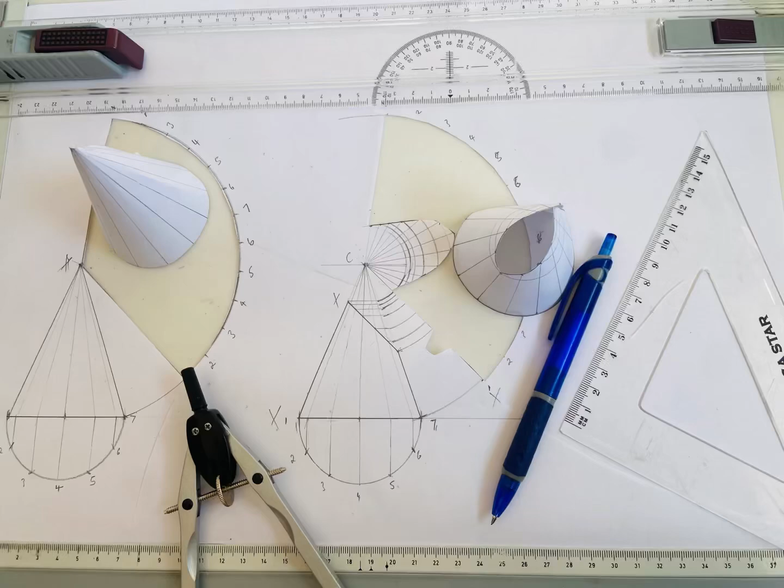Today I want us to deal with right angled cones. I want to deal with two types: the one that is a full cone and the one that is cut at the top. Now let me jump right into them.

So I'm going to make the base of my cone to be 60 millimeters. That will mean that when I want to measure it off my drawing board, I'm going to measure 6. Because why? The drawing board here, mine, has measurements in centimeters, and we know that in drawing our dimensions are going to be given to us in millimeters. So I needed to convert. So this is going to be a 60 millimeter long base of my cone. Now this is going to be the center.

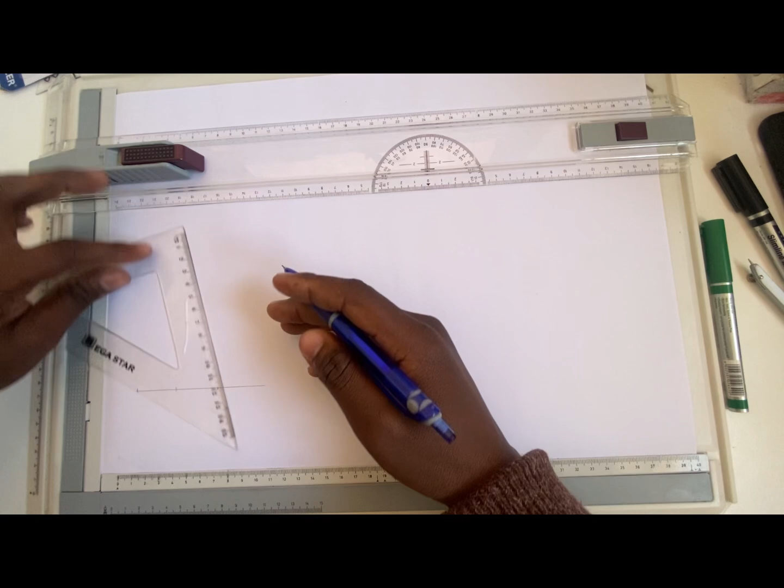Now the height, I'm going to raise it a fair height. Let me just make it maybe 8, which is 8 centimeters. That is equivalent to what? It is going to be equivalent to 80 millimeters.

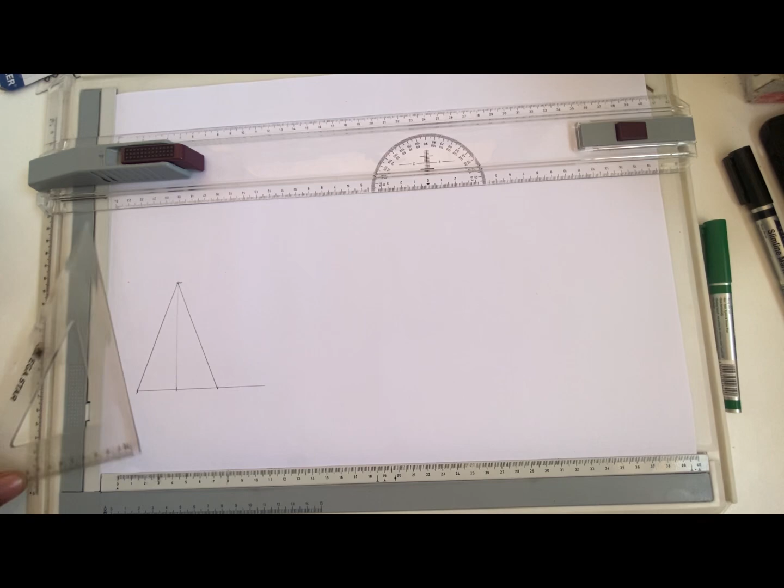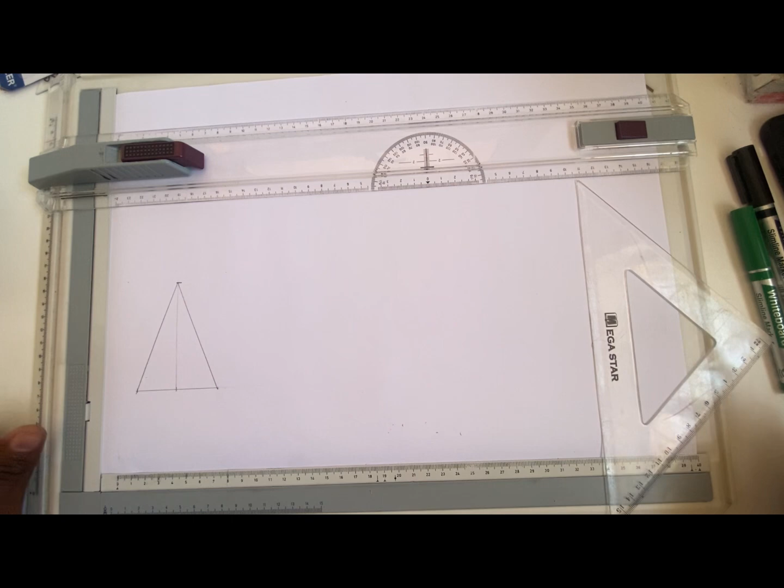That is how a cone would look. Now, given that these parts don't exist, just this one. So this is my cone. Now a cone would look something like that. Now, since this is my cone and I want to develop the pattern of the cone, first things first, you need to make sure that your given view is fairly visible. You're going to make it with your bold permanent lines.

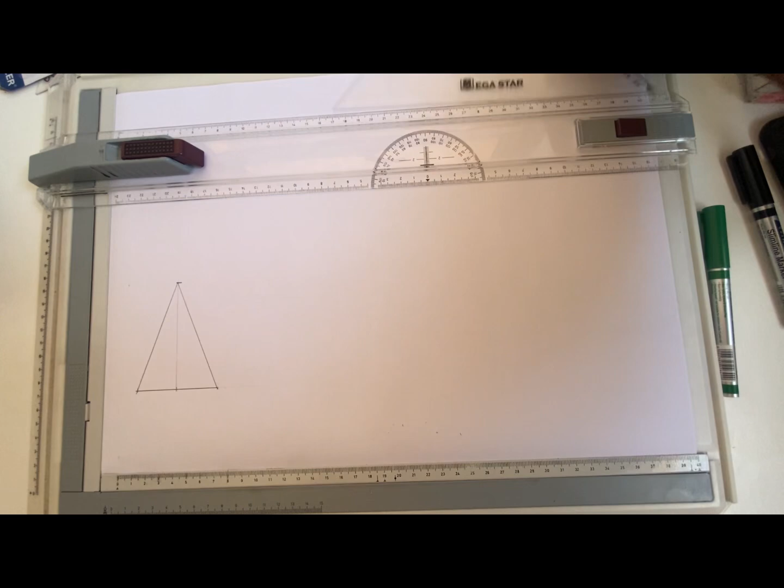Now that I'm done with mine, I'm going to go and find my bow compass. Now with your bow compass, you're going to come and make your semicircle at the base. Now it's going to be the base. Now that the base of ours is going to be from here, I'm going to make it like this. Now, once I'm done with that, I'm going to draw a line straight down.

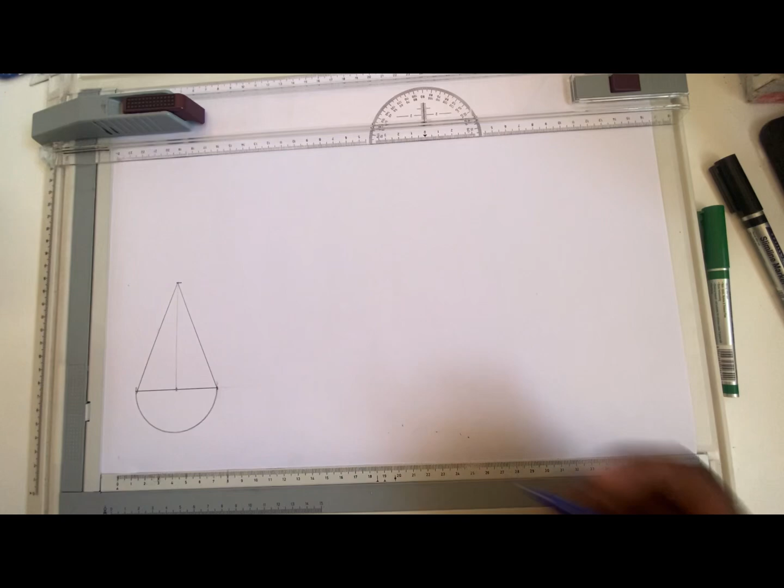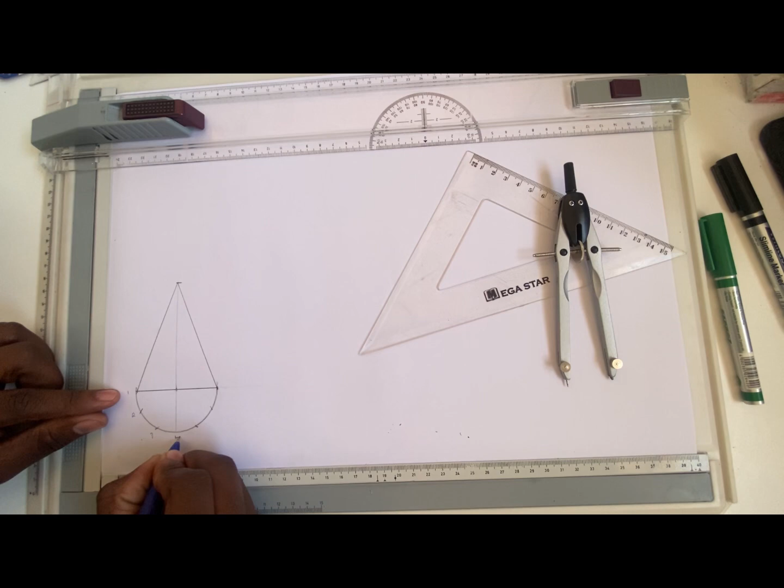Then again, I need to cut my semicircle. I put the needle part there, make an arc one side, make an arc there, and then again I come this side, I make an arc there, and then I come on this side again, I make an arc there. Now that I'm done with that one, I'm going to name it 1, 2, 3, 4, 5, 6, 7. Then I'm going to send them right to the base of my cone.

Now once you are done with it, you're going to send them from there to the tip of your cone. But for this cone, you're supposed to send them this way. But now for a complete cone like this one, it is not even necessary for me to be doing these things, but I'm going to do it. You will see these are going to help us when we have it cut at the top. But now this one is a full cone, so I'm just gonna do them for formalities.

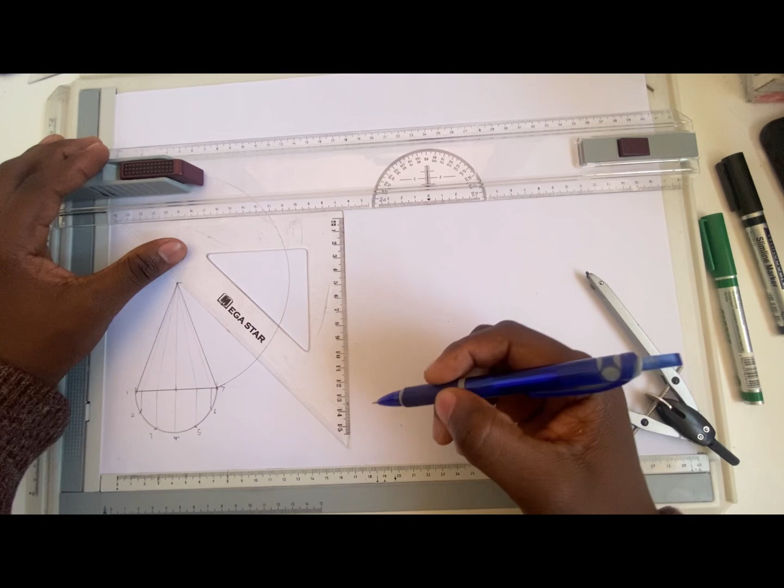And then you're gonna come with your bow compass again, position it like this, and take the longest side of your cone, which is going to be this one here. Then just like that, you send it out like that. Then you're going to pick where you want your development to start. You choose for yourself how you want it to start, from here, there, however you want, but you should link that line where you want your cone to start with the tip of your cone, and then from the tip to the arc which you just created.

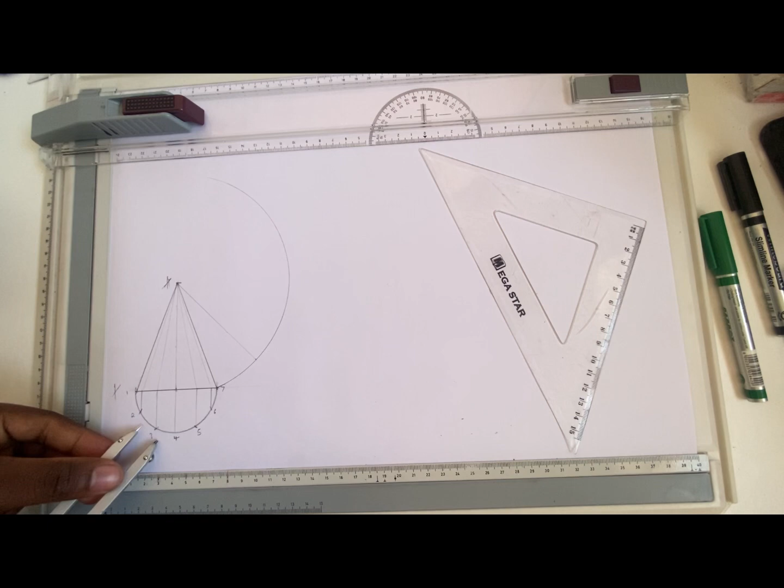That means I want mine to start from there, given that I'm opening from XX, I'm opening it from that side. So if I'm opening from 1, the first line will be my 1 line. Then you're gonna come with your bow compass again and position it at the point there. If you want you can also put it there. You're expected to measure all of them, but you've cut your semicircle into 6 equal pieces, so those pieces are equal. So therefore, if I have this one, I have all of them.

So then you're going to come here and make arcs. You're going to say 1, 2, 3, 4, 5, 6, 7, 8, 9, 10, 11, 12 will be somewhere there. I will just extend it just shortly.

Now you remember the numbers which I had here, you're gonna come and put them here. You remember that you said you are opening from XX, so the first point that comes is 1. So I'm going to be having 1 here, then a 2, then a 3, then a 4, then a 5, then a 6, then a 7. After that 7, because it's a circle, it's going to come 6, 5, 4, 3, 2, then again come back here to 1.

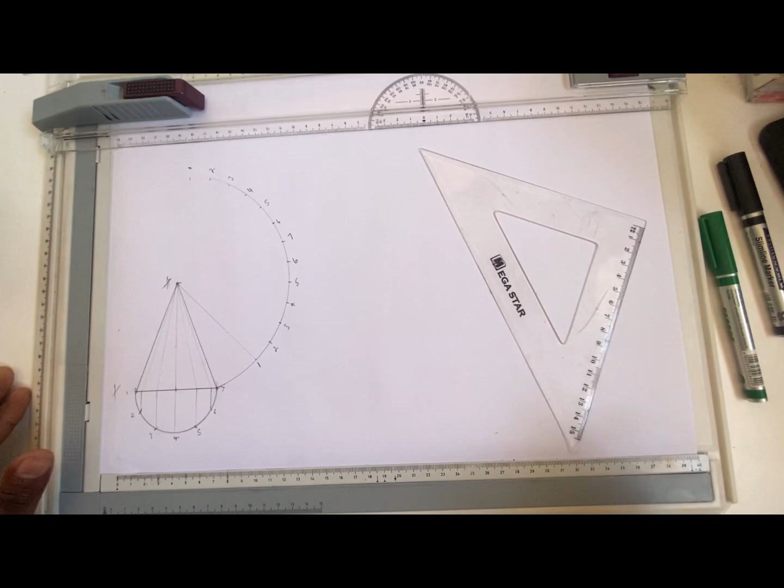So the same thing should happen. So I'm going to be having here 6, 5, 4, 3, 2, 1. Then you're going to take your lines and project them to the center, to your tip there, sorry.

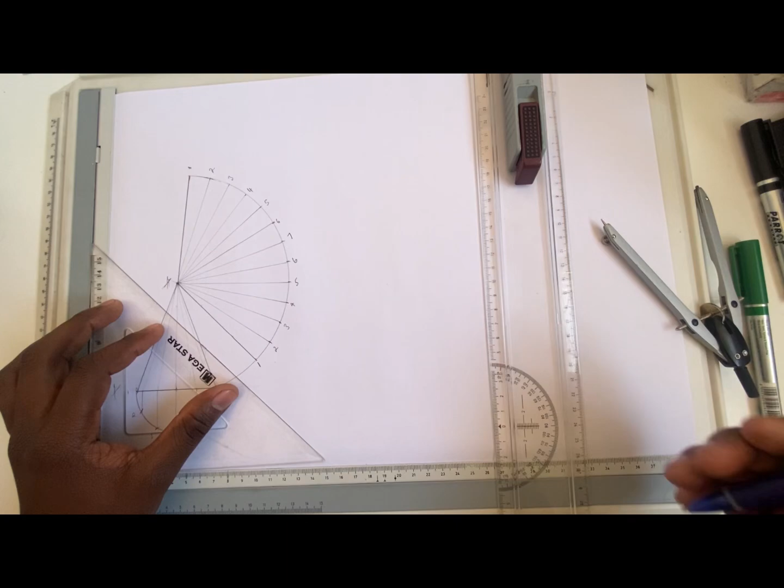Just an extending part, and then just like that I have my cone. You're going to come and highlight it out, make it bold. You take your clutch pencil, you go this side, from there you send it to there, supposed to be bold. Then also the edge again, this one supposed to be bold. Once they are bold like that, you're gonna retrace your arc, the one that you just made, because now everything lies on it. And just like that, ladies and gentlemen, you have your cone.

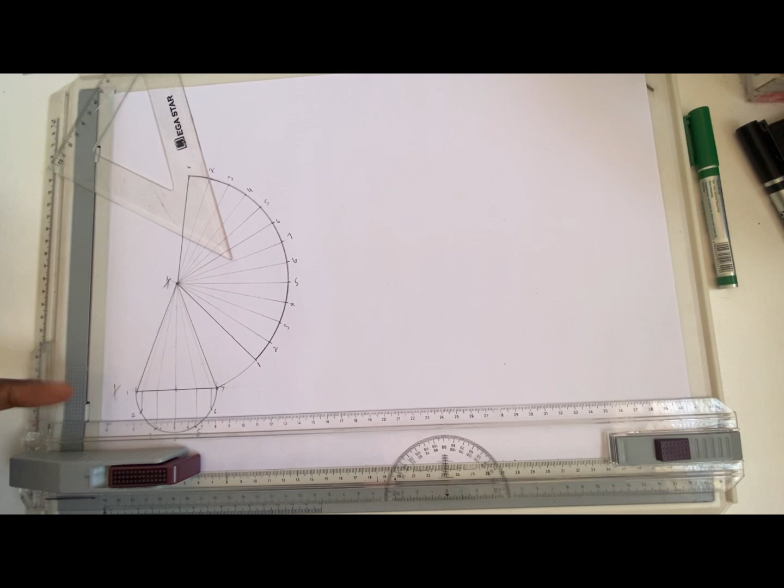So now, like I said, I wanted to show you 2 types of cones. Now I'm also going to show you how to make a cone which is going to be cut at the top. So if it is cut from here down, what will we get? I'm going to take this one, put it there, then cut it with a 45-degree at a certain point. Then we're going to see the use of having those lines. So let me jump right into it.

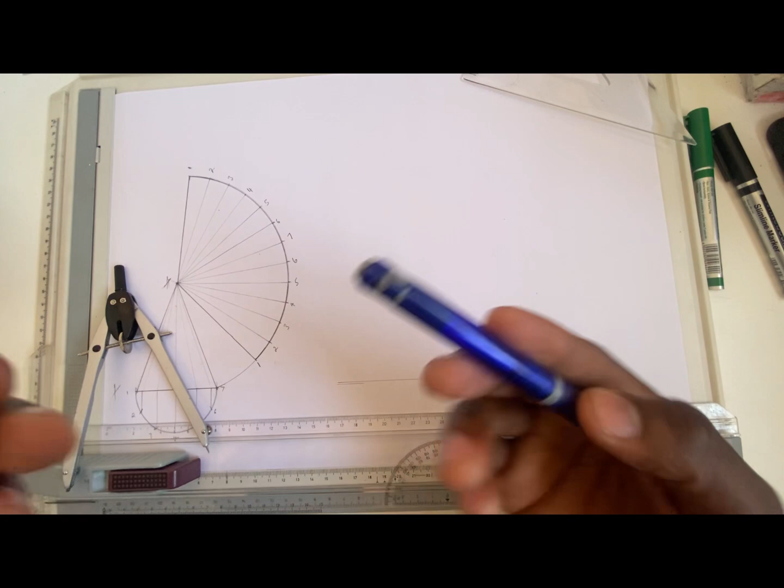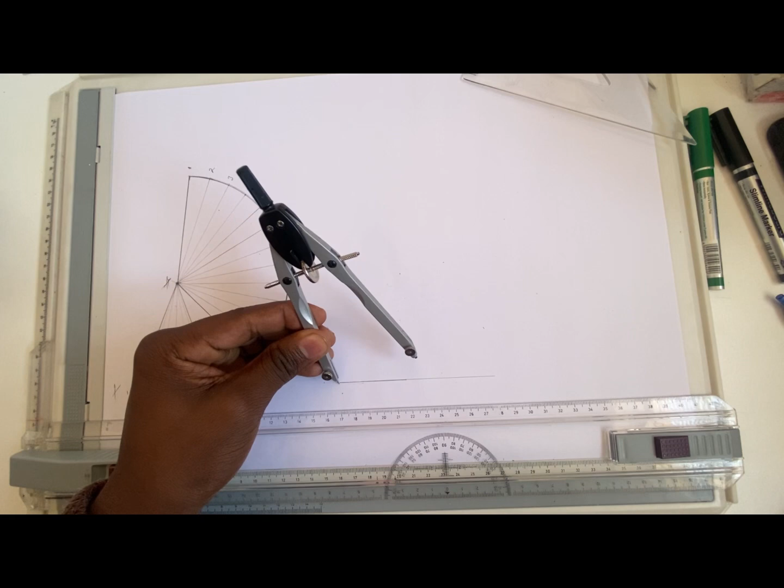So I'm going to come here this side and make my cone. I want a cone exactly the same as that one, but the only difference is I don't want this one to be a complete cone. I want it to be cut at a certain angle. So that means the base will be the same. I'm going to measure on my line the base of this cone, which you still remember we said should be 60 millimeters. Now my base would look like that.

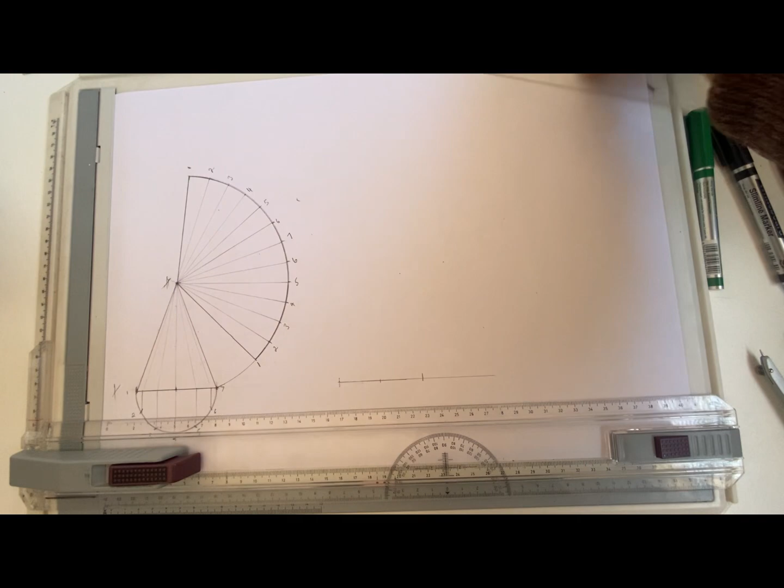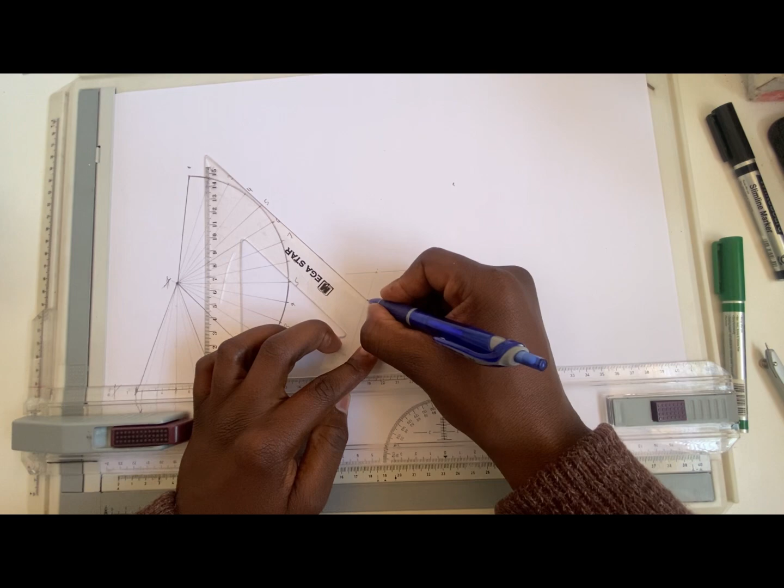I've cut my base. Now I need to cut out the center of that base. Now when they give you the question, the given view would look something like this. Let me just, don't want to make it too permanent, sorry about that. Let me just say this one from there going to there. Now on cones that are cut, the given view will come out like this. This will be your given view.

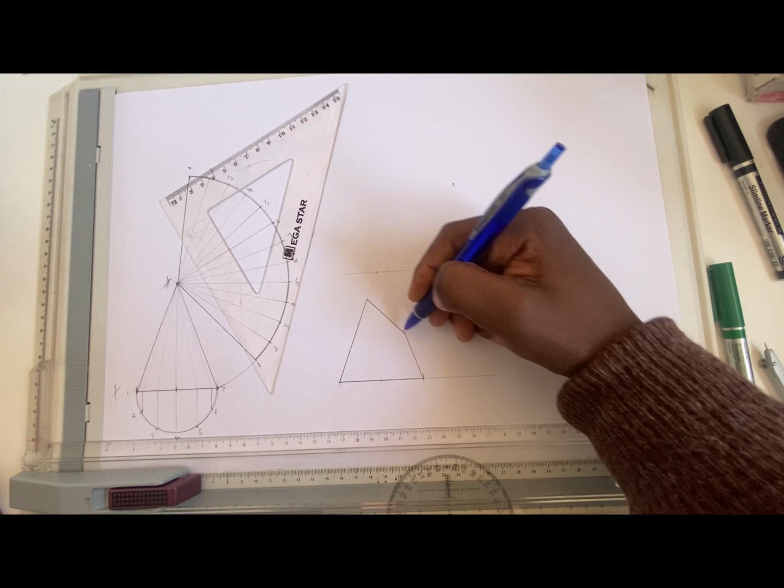So since the given view would be like this, it will not be a complete cone. This is a cone that is cut. The first thing you need to do is extend your cone, make it look like a complete cone. Put your set square on one edge, exactly on top of it, and run your line up. You don't know where it will end. Then come to this side and do the same thing. They will meet at a point that gives you where the highest point of this cone was supposed to be. But remember, the cone is not complete. The cone is this one. That is the cone they have given us.

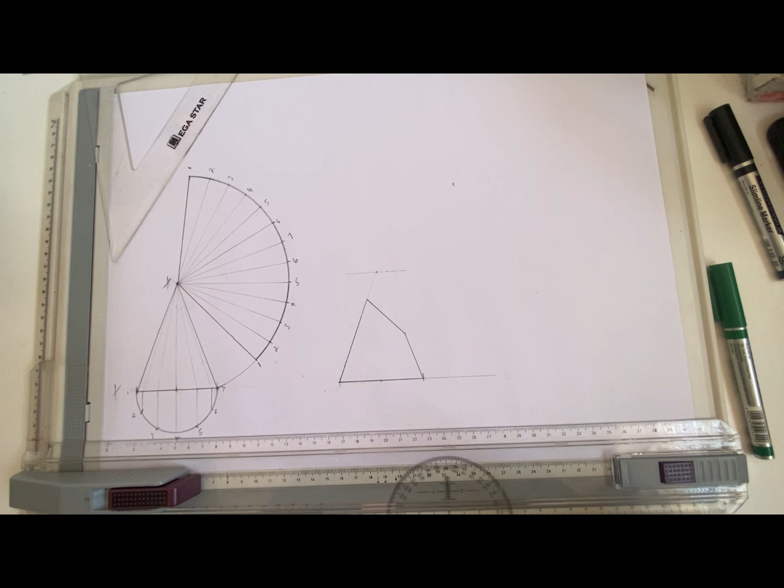But when we develop, we need to give them a pattern of the cone that will be seated. That will be this one. See, this one is a complete cone. This one rather is a different story, so they can't look the same. So let me just dive right into it. I'm going to come this side, and the first thing, like you did on the other side, you're going to need to make your semicircle on the base.

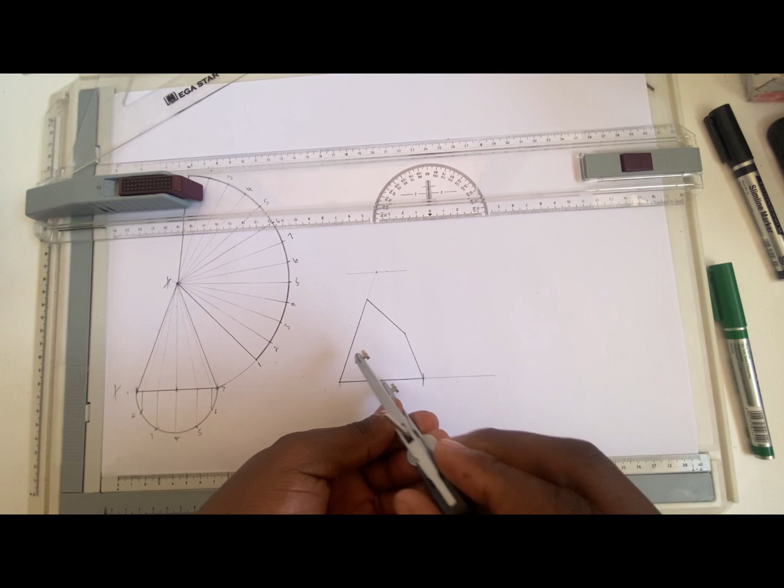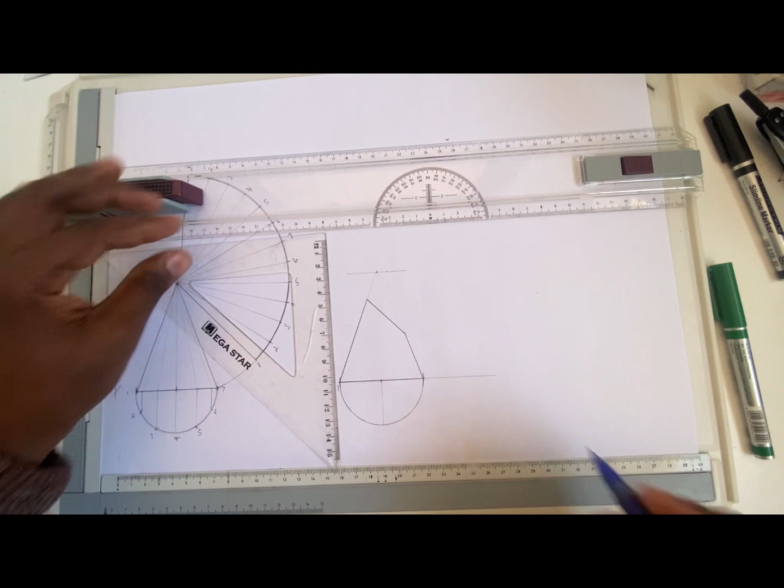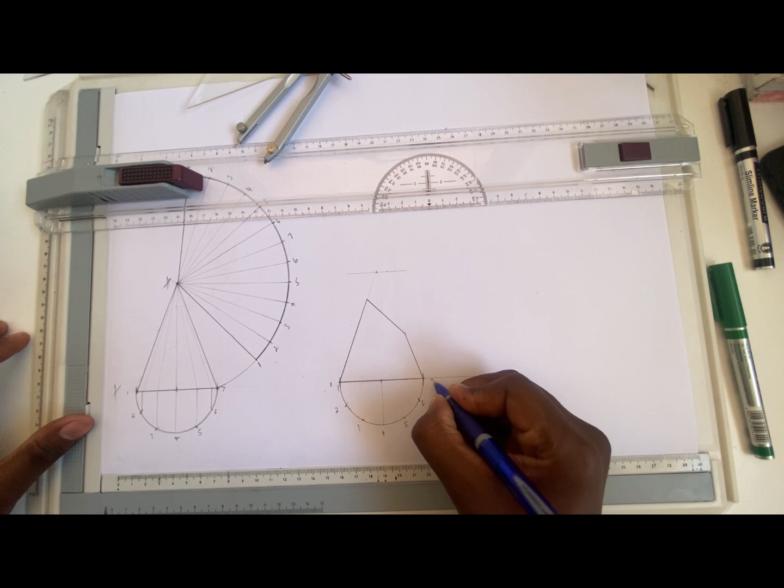Now it being like that, you're gonna come and send the line straight down. Then once you're done with that, you're gonna position it at a point, then cut, then come to this side, cut, then you're gonna come to this side, cut. Then you're gonna come and say 1, 2, 3, 4, 5, 6, 7. Those are going to be your points.

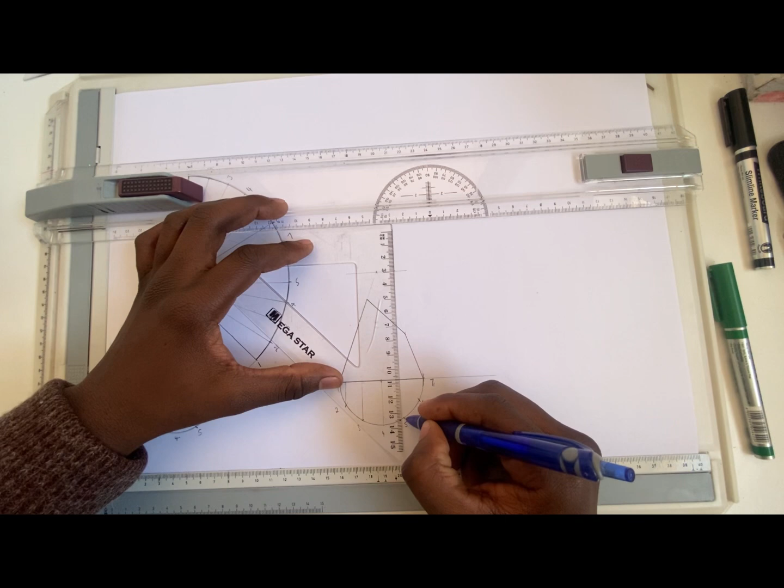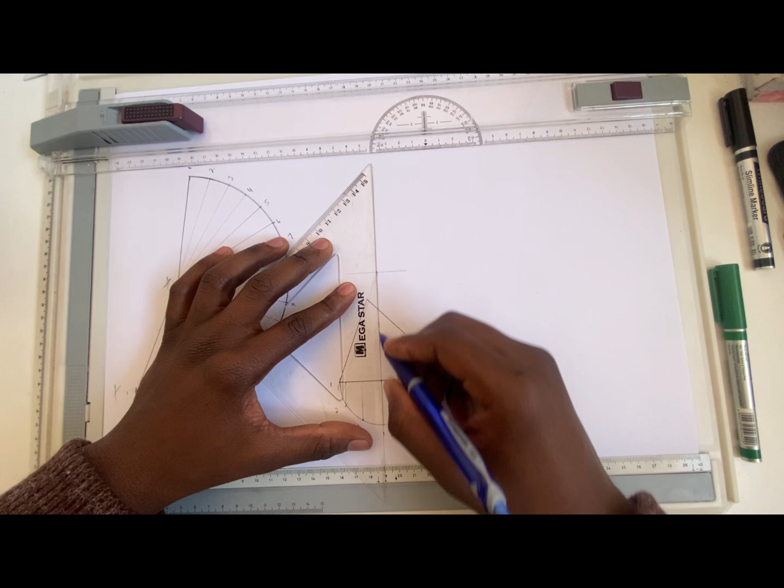Now you're gonna do what? Make sure they touch the base with a 90-degree angle. So meaning you should send this point down perpendicular to the base. Send them down to your base. Now that you are done with that, you're gonna come to the tip, you align the tip with where that line was touching, then you're gonna send it down, then the same thing to the second line, and you make it on all of your base point lines that you just made.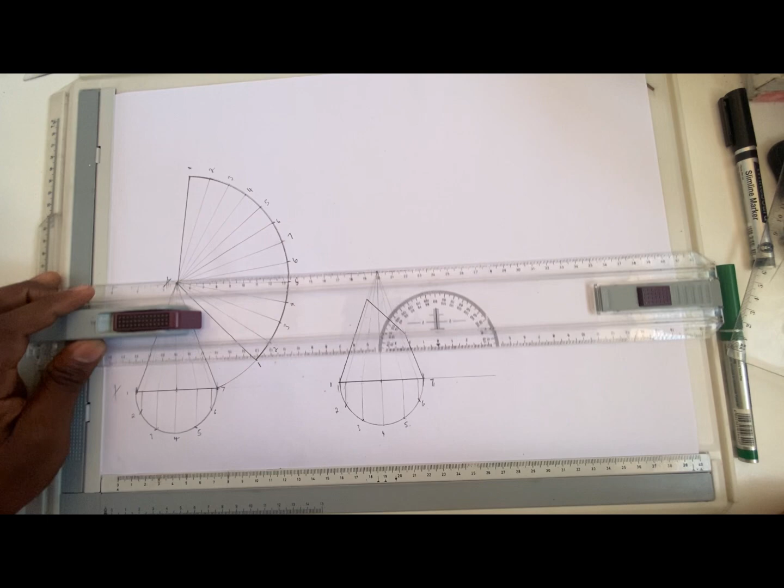Now that you have sent those lines down, this is what you end up with. Now those points that you're going to be having there, you're gonna come with your t-square, then you're gonna send them straight. You are sending them parallel to the base. You remember the base is lying on my t-square. So now you're gonna go to your points and then you're gonna send them to the sides.

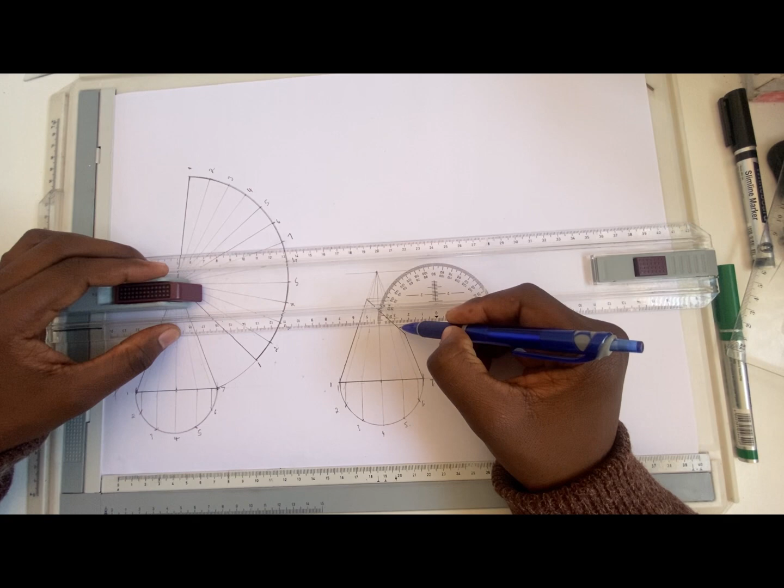Now with you doing that, you're gonna go from here, you're gonna send it that side, you're gonna go to the second point, which is here, you're gonna send it to the side, you're gonna go there, you're gonna send it there, this one there, this one there, this one there. So the trick is to make sure that you make them all align to the last line on your cone.

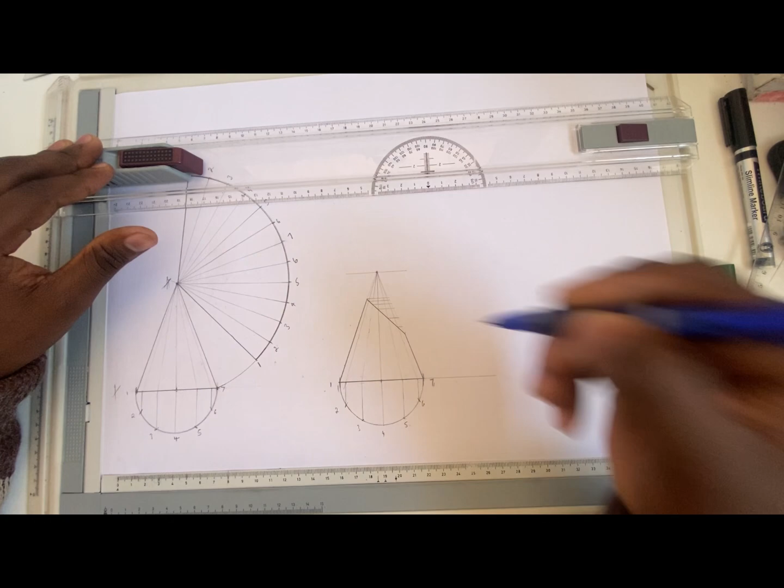Now these are what? These are the points when I send them to the side. That is where I should pick up a 1. That is where I should pick up a 2. That's where I should pick up a 3. That's where I should pick up a 4, 5, 6, and then a 7. Then you're gonna go again. You're gonna come here. You pick up the first. You take the longest line of your cone, which is this one.

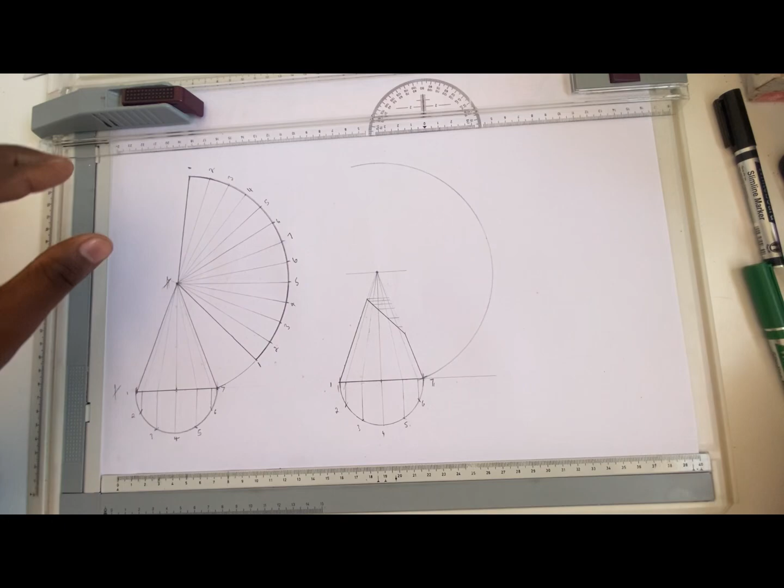Then make an arc there. Once you are done with your arc like that, you're gonna pick for yourself. This is the only line you pick for yourself where you want to start developing, but you should link it with the tip. So if I choose to start developing my cone from this distance, that means now my cone should start developing from here up.

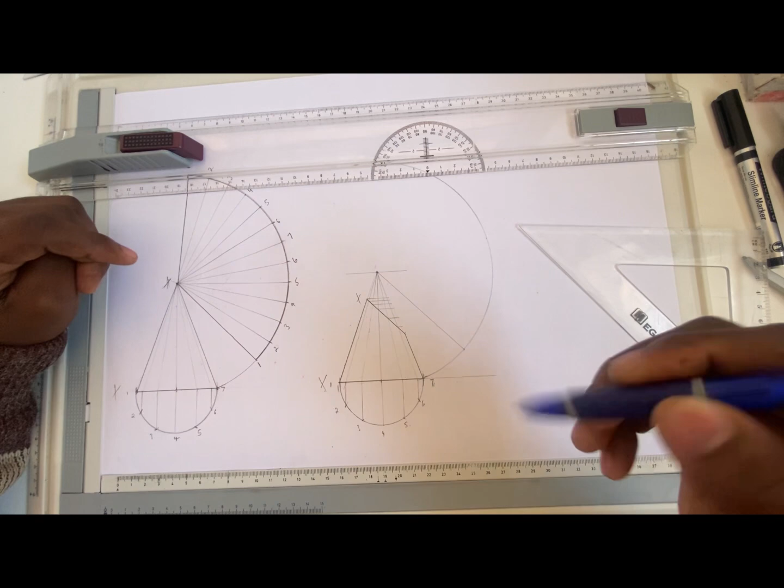So assuming that I'm opening still from XX, you can see now my XX I've placed it where? I've placed it a bit lower to the bottom, because this cone doesn't start from here, it starts from here. Remember, the cone that we are developing is this one. With that being the cone that we are developing, that should be exactly what we work with. So now I'm going to go again and say fine. From my cut point, I need to find their distances, as they are the ones that I'm going to use to the side there. Like I had already explained, we take any you want, because they are all equal.

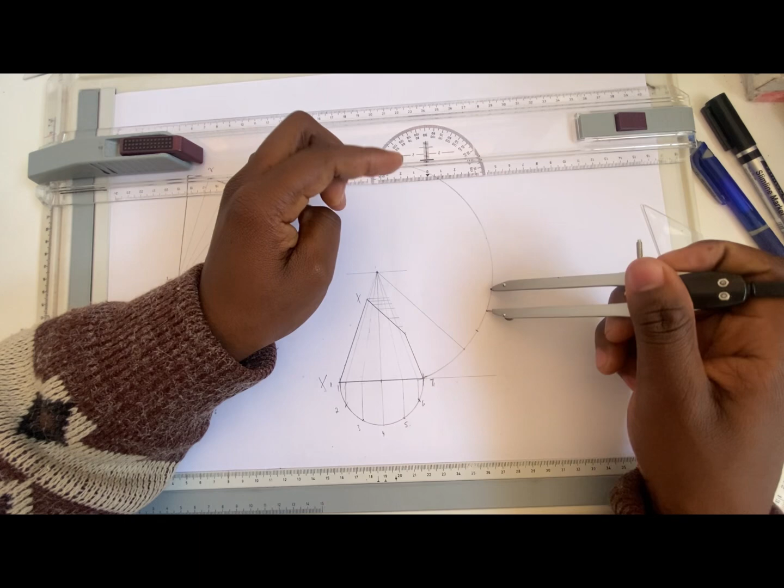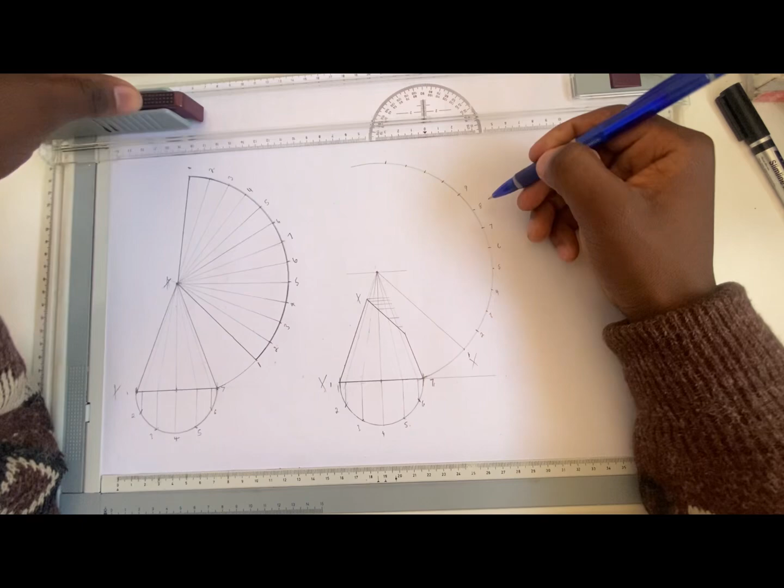So then from there I'm gonna go and make markings for them. 1, 2, 3, 4, 5, 6, 7, 8, 9, 10, 11, 12. Then it will be what? It will be your 1, which is my XX. 1, 2, 3, 4, 5, 6, 7, 8, 9. No, sorry. After 7, it's not going to be 8. The same thing, it's going to be 6, 5, 4, 3, 2, 1.

Then once you are done with that, you're gonna send them all to the tip. So they should all go to your tip, to the tip of the cone.

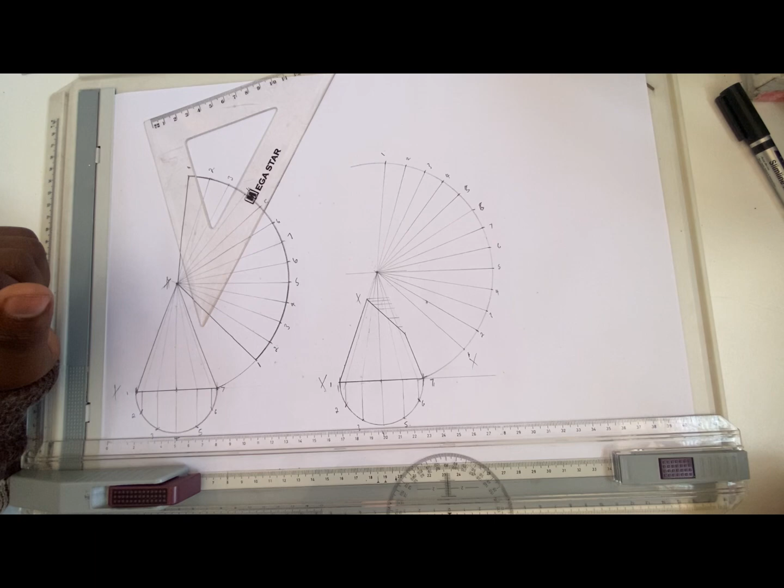Now that this is what I have, I'm going to go and do what? Remember on this one, I went ahead and highlighted from here to there, made everything bold. But now I can't, because why? The cone doesn't start from there to the tip. It slants, it is cut at this point down. So now I need to project also these lines.

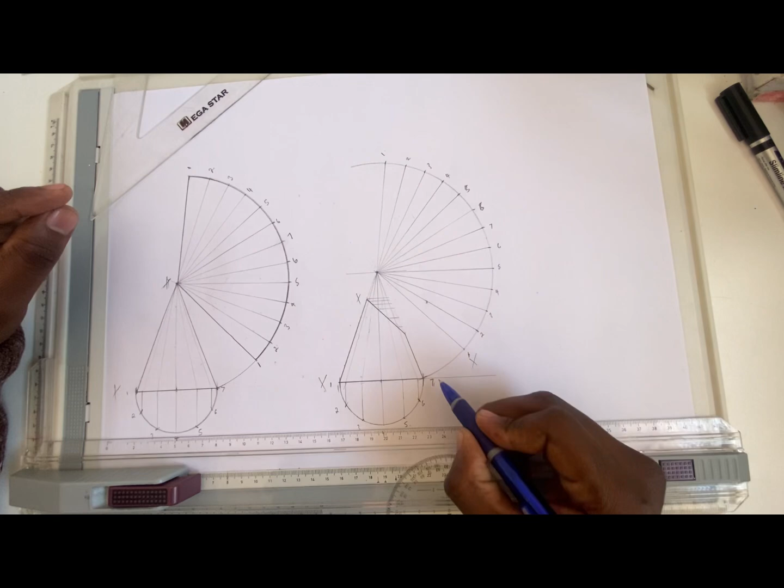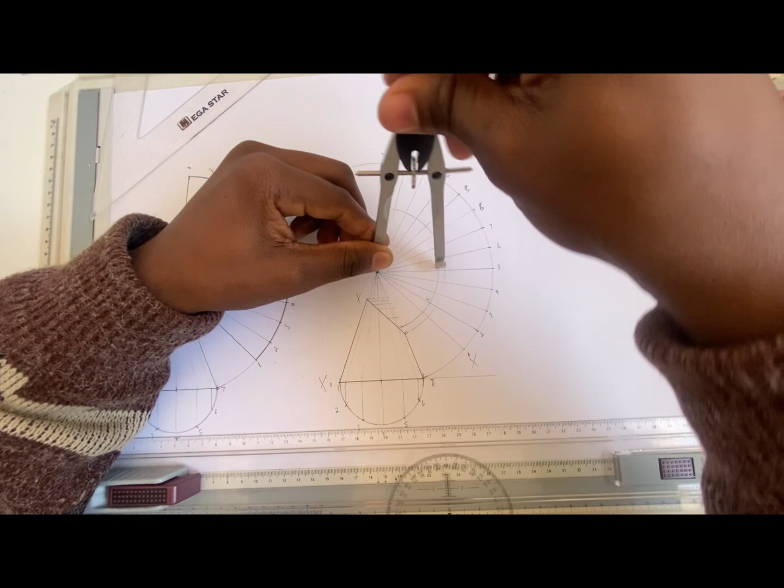The same way I've taken this one, I'm taking them now, using the highest point as my center. So put this one there. Then I pick up the last line there, the first or the last line there, which is this one. I send it to the side until it touches 1. Then the same thing again for this one, this side, send it there, and then again the second point

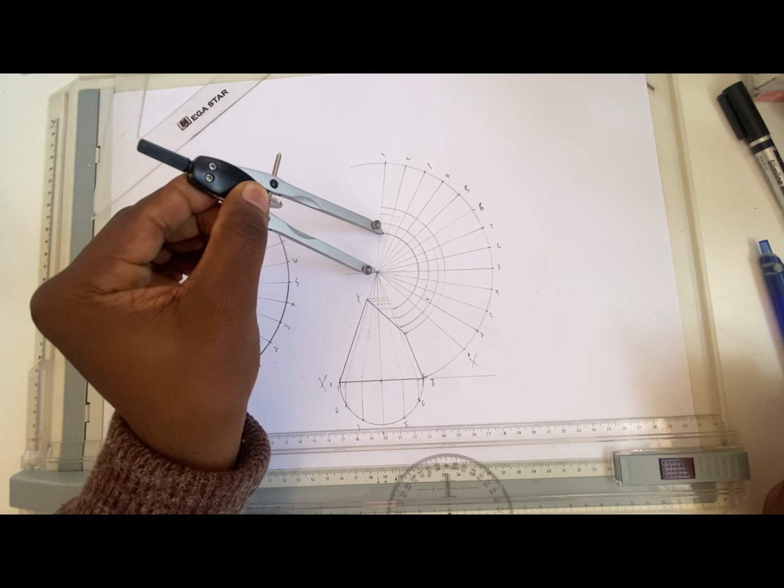until it touches 1 again, all of them until they touch 1. So this one also the same thing until it touches the other side there. And then I'm gonna take this one again until it touches the other side. This one till it touches there.

Oh, sorry about that. Too much pressure on my compass there. It is what gave me that irregular curve there. Let me just try to get rid of it. Yeah, sorry about that.

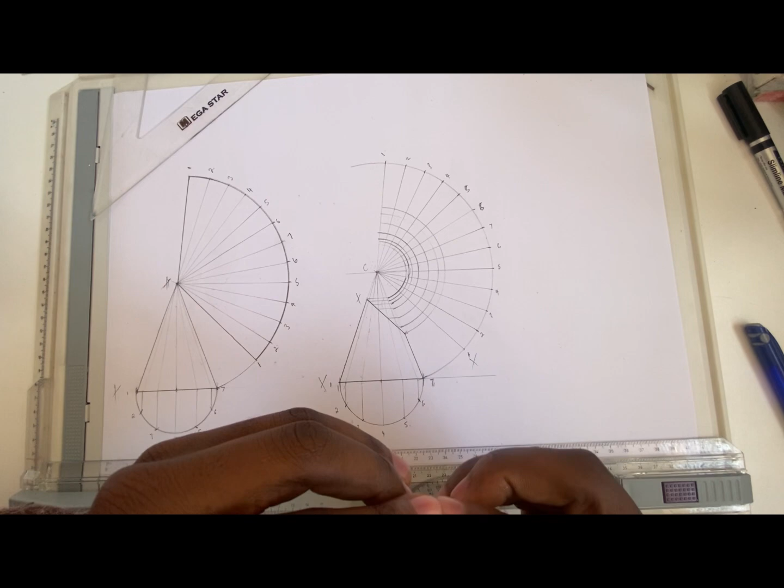Now let's do this. You remember that you see this line here, this is when I was taking them to the side. You should still remember that this one doesn't touch the tip, it curves here. It is the highest point there. You get that? That's 1. 2 goes until it touches here, it turns. This is 2, 3, 4, 5, 6, 7. So that's what I'm gonna do.

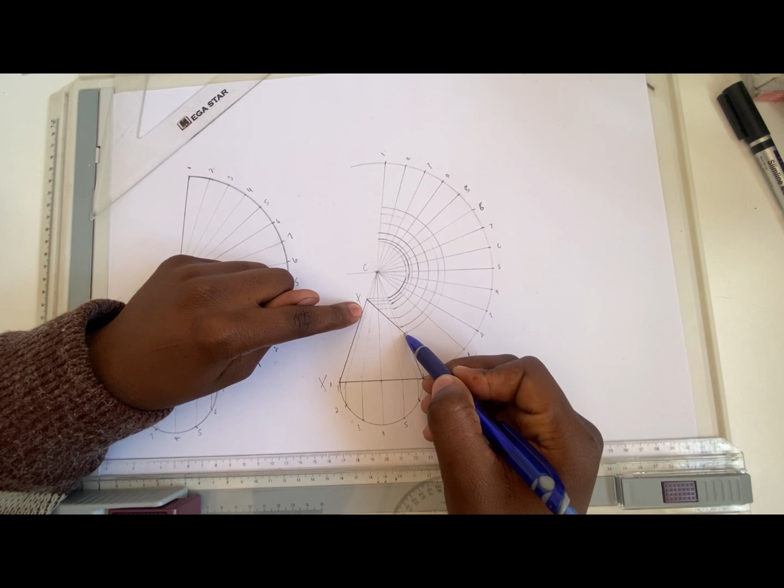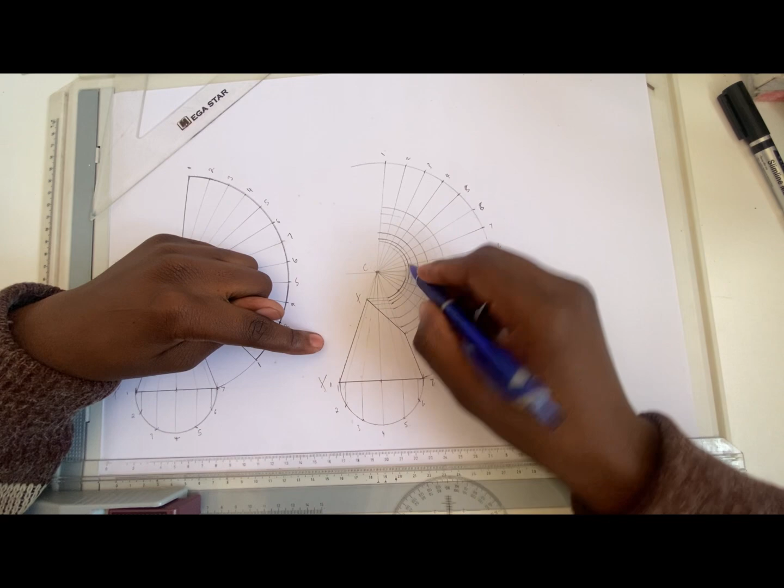So this one, the longer one, you remember, this is 1. It should pair with the 1. When the 1 and a 1 meet, they make a point. So since this is 1 and it meets with the 1 line, this is going to be a point. A 2 with a 2 line, that is this one going there, is going to make a point. A 3 with a 3, a 4 with a 4, 5 with a 5, 6 with a 6, 7 with a 7. Then it goes, because why?

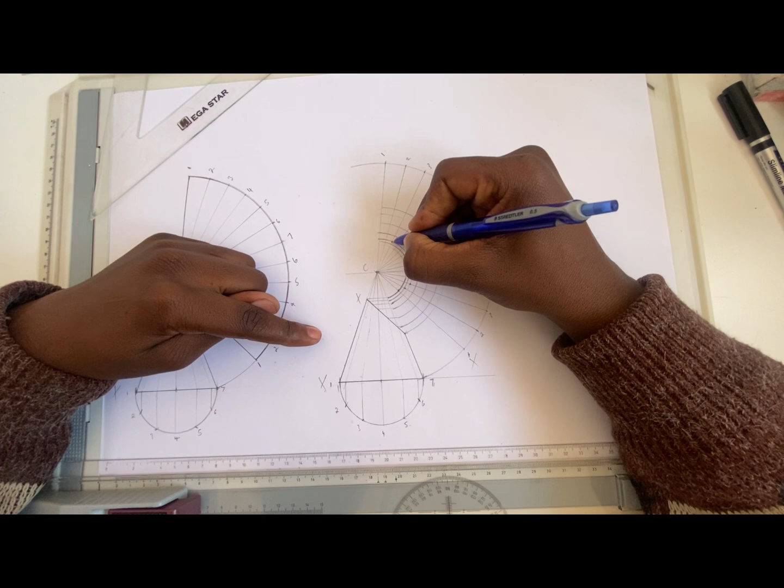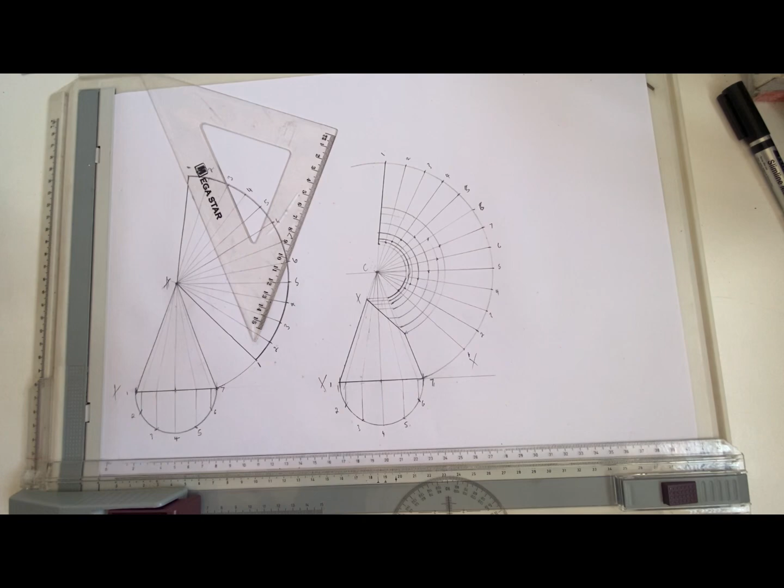This is going to be a 6 with a 6, and then a 5 with a 5, a 4 with a 4, a 3 with a 3, a 2 with a 2, then a 1 with a 1. Then now this one will run from here, from the base there until the point. Then you're going to join your points. All of your points, you're going to join them, from this one to that one and so forth.

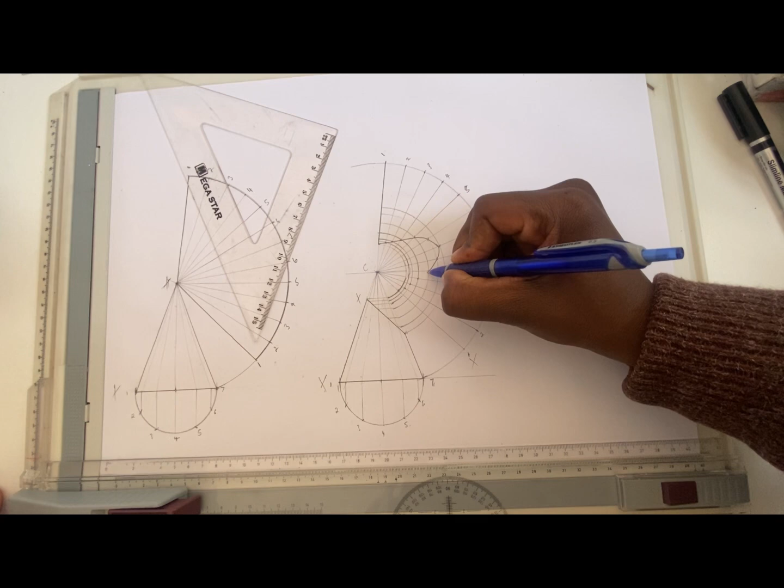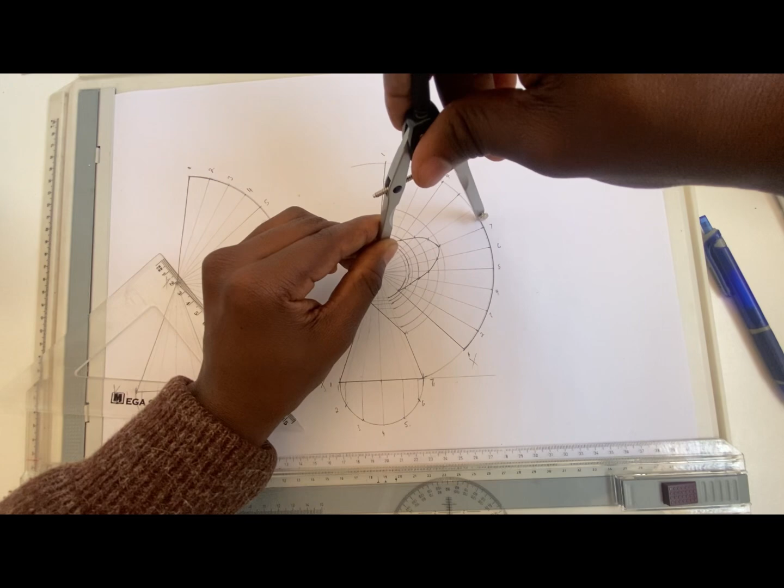So you're trying to highlight this part so that you know exactly what you have. You highlight only until where the cone ends. The cone will end at that point. So now our pattern, the pattern we're supposed to draw on a metal sheet when we want to make a cone that looks like that, is going to be this one.

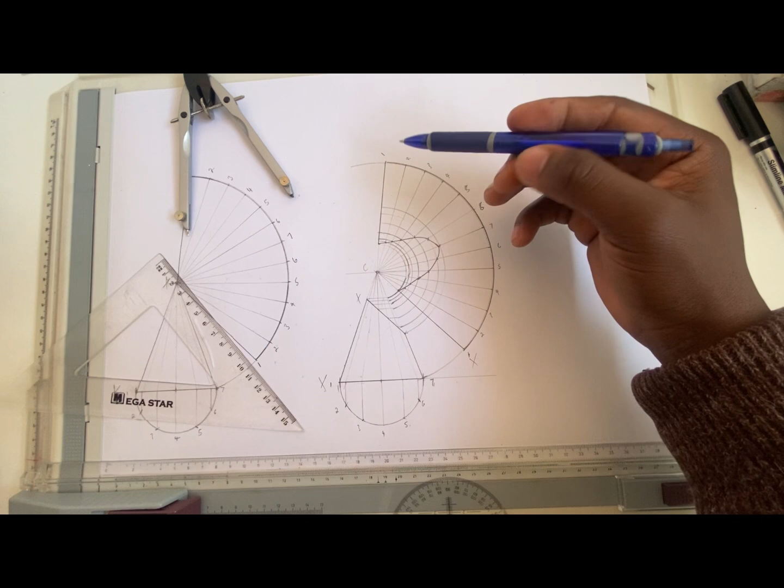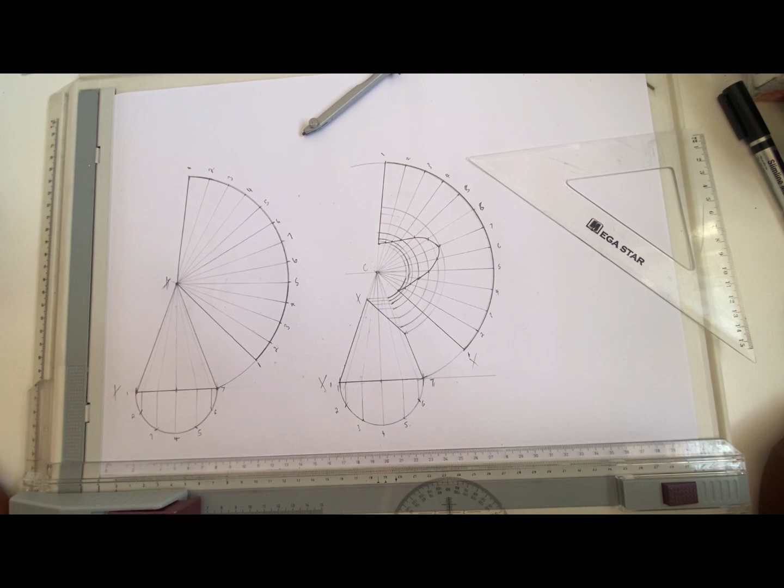Then I'm gonna cut them out for you. Then you're going to see how they would look after they have been cut and put in a rolling and bending machine, and which type of cone will be produced. So I'm going to fold them real quick and show you how they would look. Stay tuned for the end results. But this is what you'll be expected to do in the examination if they ask you to develop a cone.

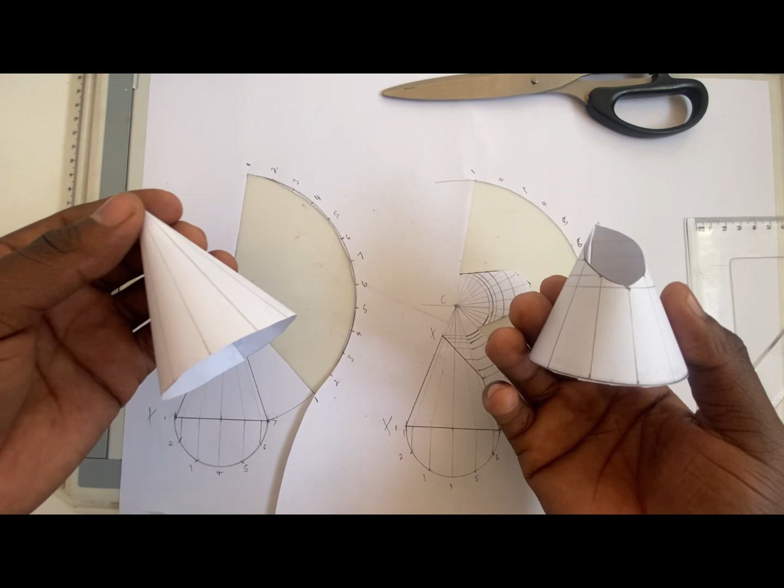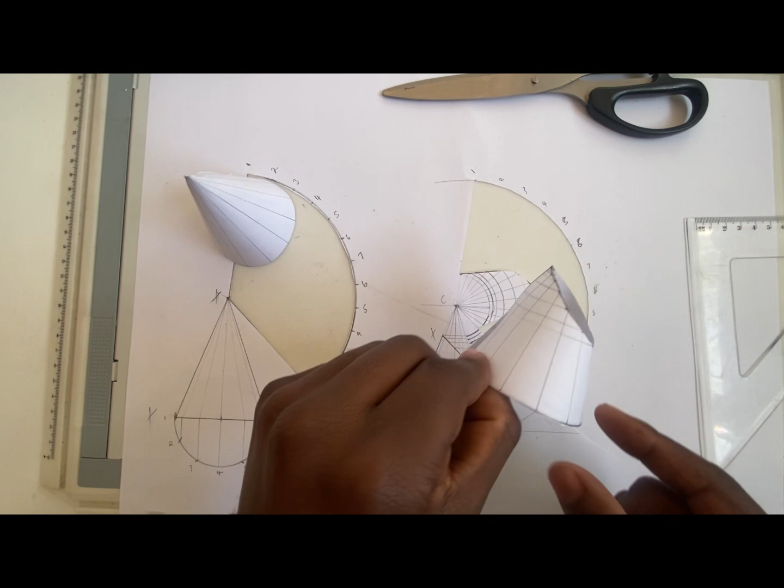Ladies and gentlemen, just like that, you have your perfect cone, which is the one that is not cut at any angle. And this cone here would look like this. The reason it's slanting there, I'm making you face it; if you want to view it the way this one is, it should be positioned like this. So this is the cone. Once you have developed this in the metal sheet and cut it, you'll end up with this. So those are your cones, ladies and gentlemen.